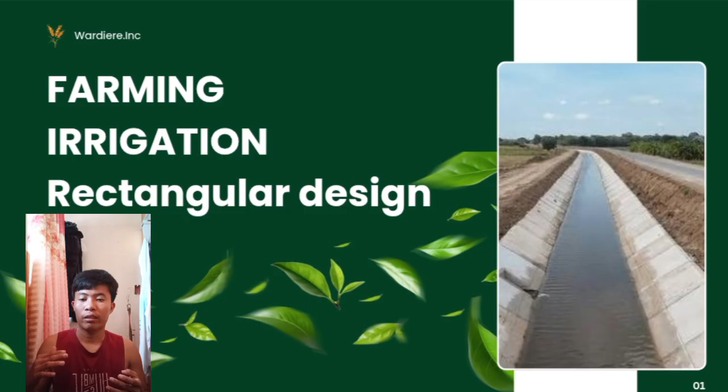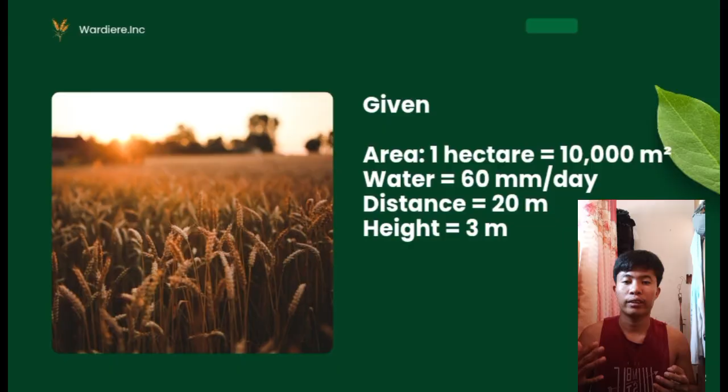Let's start. So, the given area is 1 hectare, equal to 10,000 square meters. Then, the water is 60 mm per day. The distance is 20 meters. Then, the height is 3 meters. Then, the water requirement is volume equals area times depth: 10,000 times 0.06 is equal to 600 cubic meters per day.

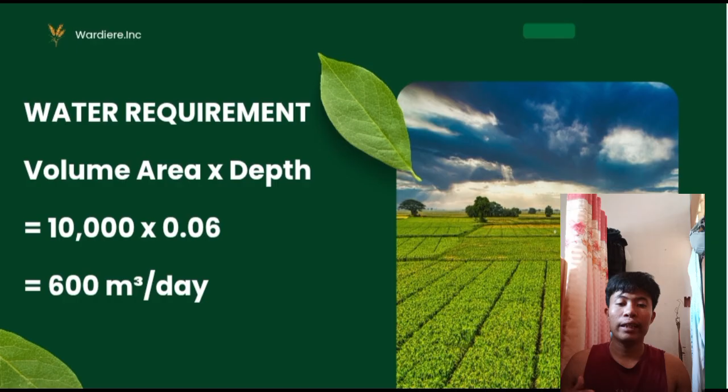So the discharge quantity is calculated as quantity equals volume over time. Volume used is 600 cubic meters, likely the total volume over a specific period. So the time is 86,400 seconds, which equals 1 day, since 24 hours times 60 minutes per hour times 60 seconds per minute equals 86,400 seconds. So the quantity is equal to 600 divided by 86,400, equal to 0.00694 cubic meters per second, rounded to 5 decimal places. Since a cubic meter is equal to 1,000 liters, it is multiplied by 1,000.

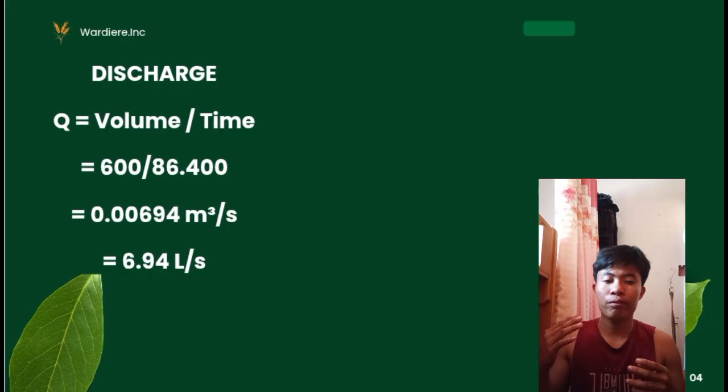And 0.00694 times 1,000 equals 6.94 liters per second. So here in the canal design, first we start with the formula that links discharge, velocity, and cross-sectional area of flow. Discharge quantity equals cross-sectional area times velocity. This is a fundamental equation in fluid flow for open channels like canals.

So, from our earlier calculations, we already found the required discharge quantity, 0.00694 cubic meters per second. For this canal, the design velocity is set at 1 meter per second. This is a typical value chosen to balance efficient flow and prevent erosion or sediment build up. To find the cross-sectional area, we rearrange the formula. So area is quantity over velocity.

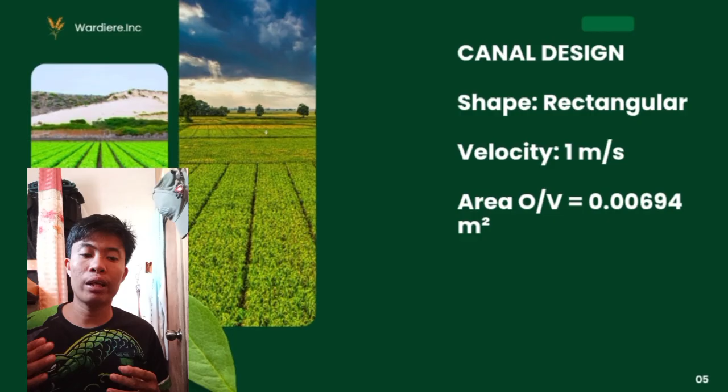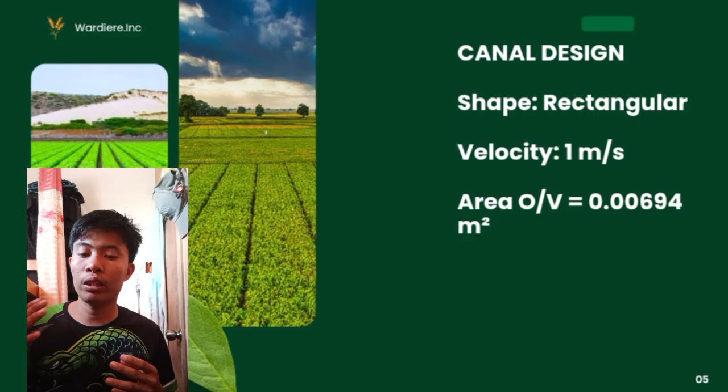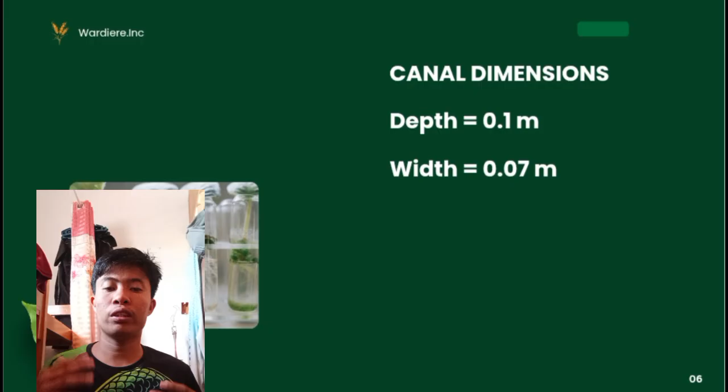So plugging in the numbers, area is 0.00694 cubic meters per second divided by 1 meter per second, equals 0.00694 square meters. So that's how we arrive at the required cross-sectional area of 0.00694 square meters for the rectangular canal. So here the canal dimensions: the depth is 0.1 meters, then the width is 0.07 meters.

A ram pump is a hydropower device that uses flowing water's momentum to lift a portion of water higher. No electricity or fuel needed. Then how it works: water flows through a drive pipe and builds speed. When the flow is fast enough, a valve slams shut, creating high pressure that pushes water up a delivery pipe to higher ground. The valve then reopens and the cycle repeats.

Advantages are low cost, almost no maintenance, eco-friendly. Then the limitations: it needs consistent flowing water with a drop in elevation, only lifts a small amount of water, and requires precise setup. Then the applicability to our farm: not suitable. Our river flow is not confirmed to be strong enough, and there is no drop in elevation to create momentum. The field is higher than the source, not the other way round.

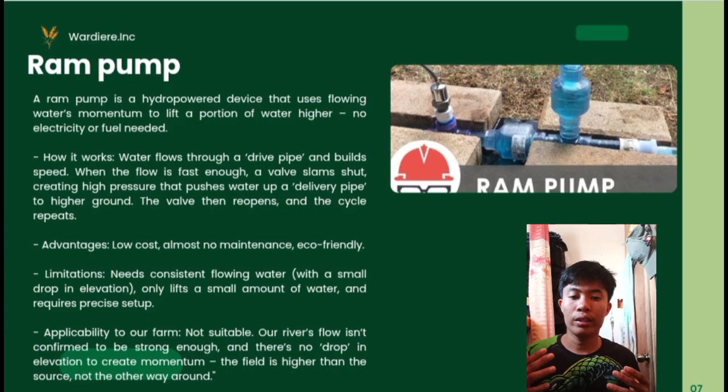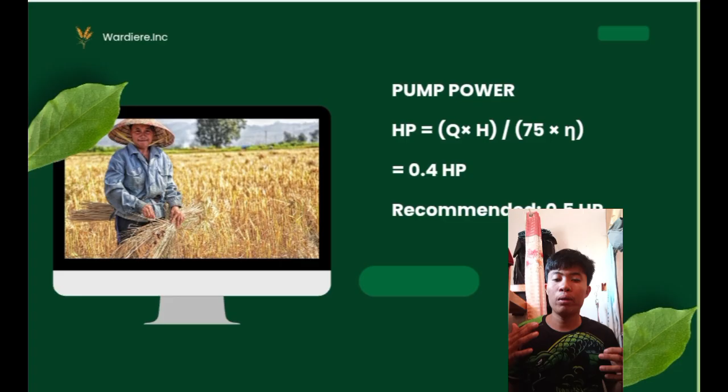The hydraulic power requirement of a pump is Q times H, divided by 75 times eta, which equals 0.4 horsepower. Then the recommended is 0.5 horsepower. The system is efficient and low cost, suitable for the farm.